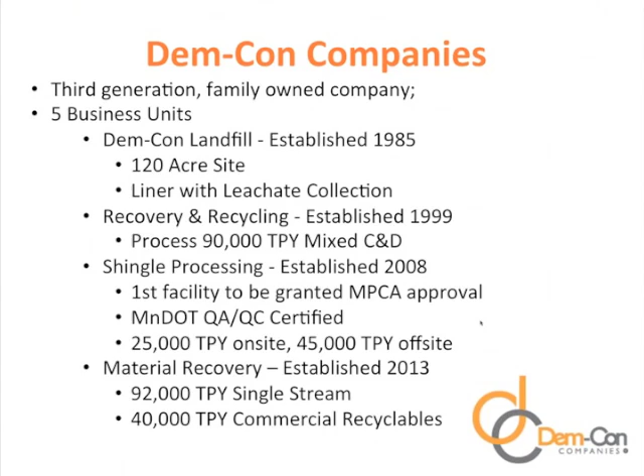And then most recently, we opened a material recovery facility that is a single stream plant. We do about 92,000 tons per year of residential and commercial single stream. In addition, that same facility processes about 40,000 tons per year of commercial recyclables, typically most source-separated OCC predominantly.

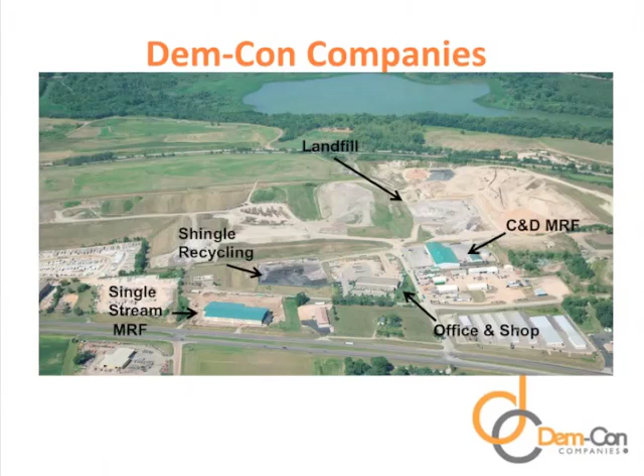We process those in 2 different areas. We have 2 different specs, and our hot mix asphalt producers like those materials separated, so we do not blend those together. And then in the bottom picture, the single stream MRF, that's about a 60,000 square foot facility that just opened up about a year ago. So a new operation for us, and that's been going pretty well.

So we like to do a bunch of different things.

This was a study done by Foth Infrastructure and Environment a few years back. Some of the data is a little dated, but it's one of the better pieces I've seen that talks about the different components of C&D. We see a lot of waste studies and waste sorts done on MSW, but we don't see near as many done on C&D, which is what we process on a daily basis. So when we have information like this at our fingertips, we tend to use it quite a bit.

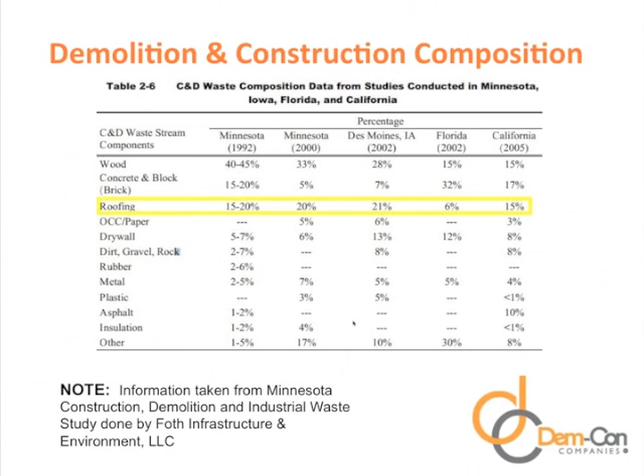But flat roofing is a pretty small percentage of those numbers. So it tells you there's a lot of asphalt roofing material out in the marketplace that is ready to be recycled. That was one of the things we looked at pretty heavily when we decided to get into the business. All right, next slide, Wayne.

As we mentioned before, there are 2 different types of asphalt roofing shingles we'll talk about today. One is manufactured scrap shingles. The latest studies show there's about 1 million tons of manufactured scrap shingles generated annually, and the majority comes from the 3 main producers: Owens Corning, CertainTeed, and GAF. We're lucky in Minnesota—we have all 3 of those plants operating in the Twin Cities.

At one point in time, we have taken material from all 3 of those. They've been great to work with, and they're very involved in the CDRA Shingle Recycling Committee. They have sponsored a lot of different shows, sessions, webinars, and our shinglerecycling.org website. Those manufacturers of shingles are very interested in seeing this material get recycled, and nationwide the majority of that tonnage is currently being recovered, which is a nice statistic.

The second type of asphalt shingle is the post-consumer tear-off. It's estimated that annually there's 11 million tons of this material generated nationwide. On an annual basis, that is a heck of a lot of shingle material. The percentage that's recycled is continuing to grow; however, we have a long row to hoe to keep all this material out of the landfill. So it gives you a little bit of scope of what we're dealing with as far as tonnages.

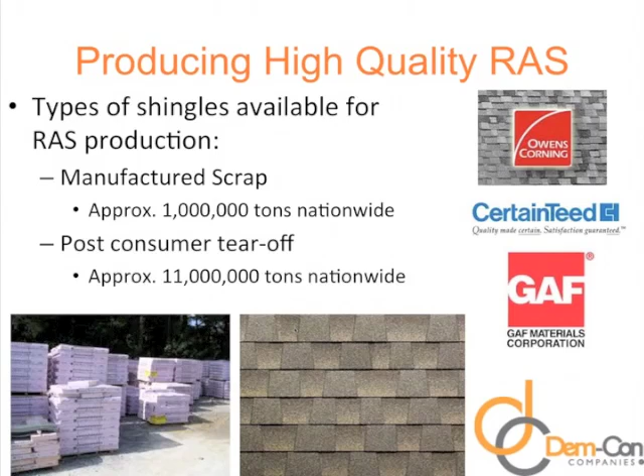Next slide. So we'll talk a little bit more in detail about manufactured scrap, and these percentages are estimates based on what we've found from working with hot mix asphalt plants, and depending on what part of the country the shingle's produced in, these numbers will vary a little bit. But the actual asphalt content within a fiberglass shingle ranges anywhere from 15 to 24%, and there's a pretty decent variation in range in there, but that's all based on the type of shingle that's produced. We've all seen shingles that are 20-year, 50-year shingles, and the majority of that is dictated by what ingredients go in there. So there's a decent range.

What we've typically found in our marketplace in Minnesota, the manufactured scrap shingles have around 22% asphalt within them. There are some manufacturing facilities that are making organic-based shingles. That has a much higher percentage of asphalt within them. We're seeing that in the 30% plus range. So if you're in a marketplace where people are still manufacturing organic shingles, you'll see higher asphalt content, which is a little bit more valuable to a shingle processor as well as a hot mix asphalt plant. But a lot of manufacturing facilities have moved away from organic-based shingles, but there still are a few out there.

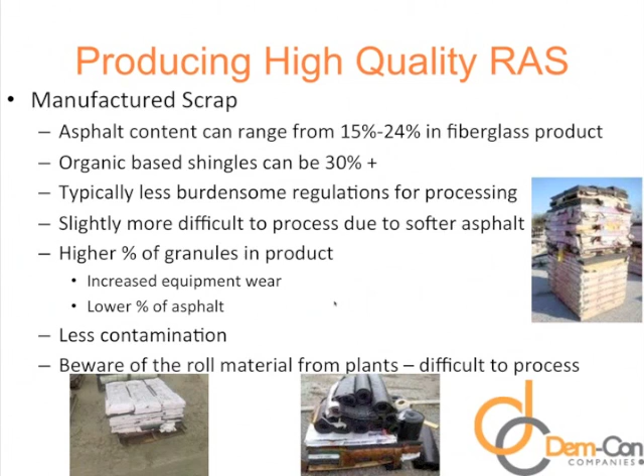The one cautionary tale or advice that I'll give is if there are manufacturing plants that include roll material in their product that they send to recycle yards, it's just very difficult to process. They tend to bog the piece of equipment down on the grinding side. Doesn't matter which grinder you have, they all are challenged with trying to process an entire roll of shingle or an entire roll of tar paper. So if you're looking into the marketplace and you're starting those discussions with manufacturing plants, just make sure that that's part of your discussion, knowing whether or not that material is included in there.

The second and the other type of shingle material is post-consumer tear-off, so it's just a fancy name for old shingles that were on somebody's house. This asphalt content is typically slightly higher than the post-manufacturing waste material. The asphalt content typically is seen anywhere between 20 to 25, sometimes a little bit higher than that. We push close to 25 in our marketplace on the post-consumer tear-off material.

There's less granule material due to the wear and handling, as I mentioned before. So as you lose granules at different spots along the process, your asphalt as a percentage of the shingle weight tends to go up a little bit. The asphalt's a little stiffer due to the oxidation process that happens when it sits on the roof.

One easy way to tell this is if you go and look at a brand new shingle, you can take it, you can bend it, and it'll bend real easy. You take a shingle that's been sitting on somebody's roof for a number of years, you try to bend it in the same way, and it'll crack in half. So the asphalt is a little bit more stiff.

One of the nice things about that is it doesn't re-agglomerate nearly as fast as the manufacturing material does. We can have this material sit in its final state for multiple weeks, even a month, and it doesn't really re-agglomerate back together, where the manufactured scrap in the warm summer months, within 4 days or so, you have to rescreen that material because it just clumps back up into bigger balls.

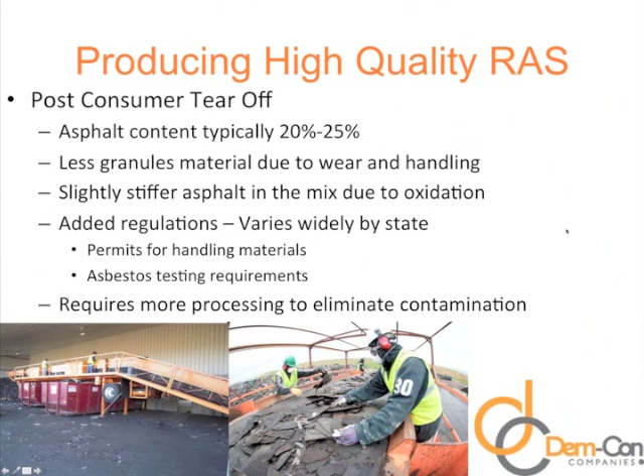And it does require more processing to eliminate the contamination. Like I had said, the manufactured scrap material comes in pretty clean. The post-consumer tear-off is quite a bit more dirty. So I just have a couple photos coming up here. I'll talk about them a little bit as we move through.

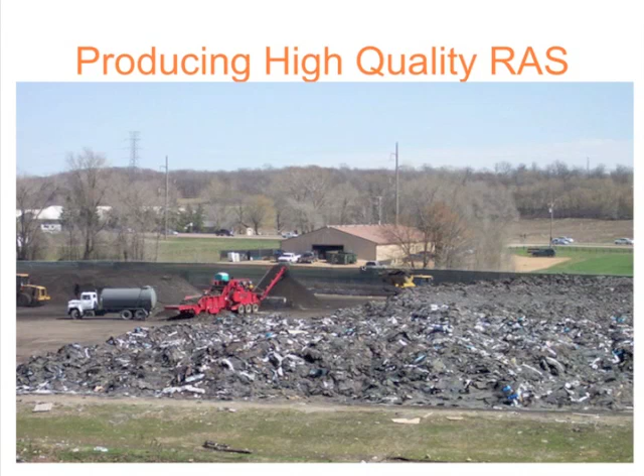But we'll usually grind first, screen later, and then the material on the upper left-hand corner, you can see just kind of a black pile over there. That's ground material that's currently stockpiled, being ready to be moved out to market.

The next photo is just a picture of us grinding our manufactured scrap material. So obviously the picture just prior to this was post-consumer tear-off. This is a photo of our manufactured scrap, much cleaner. We really didn't do anything to this pile. That's kind of what it looks like as it comes in. We feed this piece of equipment with a backhoe. It tends to feed pretty well, pretty smoothly, and then you can see the material coming off the belt.

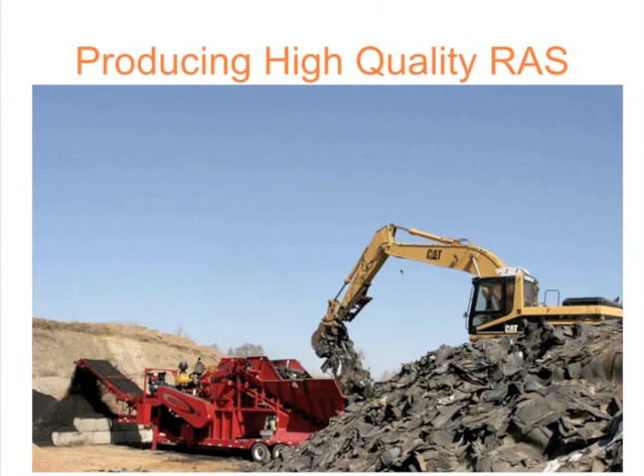Depending on what size we're grinding to, anywhere between 80 to 90 ton per hour coming off of those pieces of equipment is about what we see on a continuous basis, whether it's cold weather or warm weather. That's kind of the average that we see. So pretty good, steady eddy type of equipment that just processes on a daily basis. But this is our manufactured scrap pile.

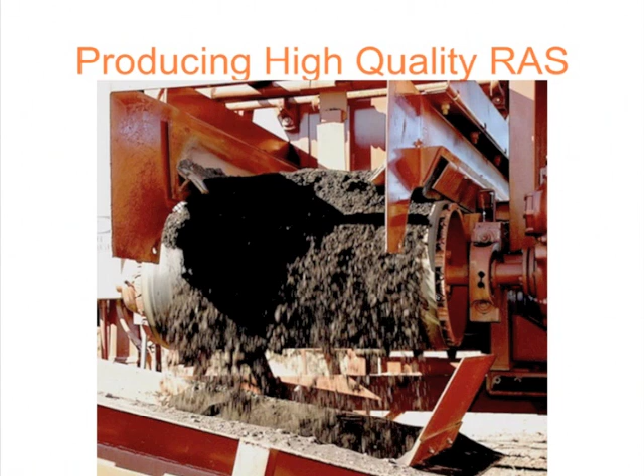So we delivered a good clean product to the plant, and that really helped move us along quickly, because they were expecting to see quite a bit of contamination coming off this, because they just couldn't believe that the equipment on the front end in our yard was able to take the nails out at the quantity that they were seeing them come out of there. So that was the good news. So next slide, Wayne.

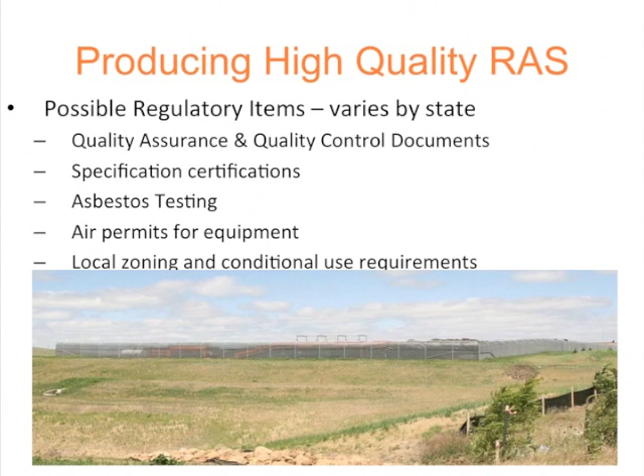So it's just one more thing to be aware of whether you permit locally or look at doing mobile grinding. Then there's local zoning and conditional use requirements. That's kind of a standard feature. If you're dealing with different materials, you just have to make sure you meet all your zoning and conditional use requirements if you want to start up a facility. All right, Wayne, next slide.

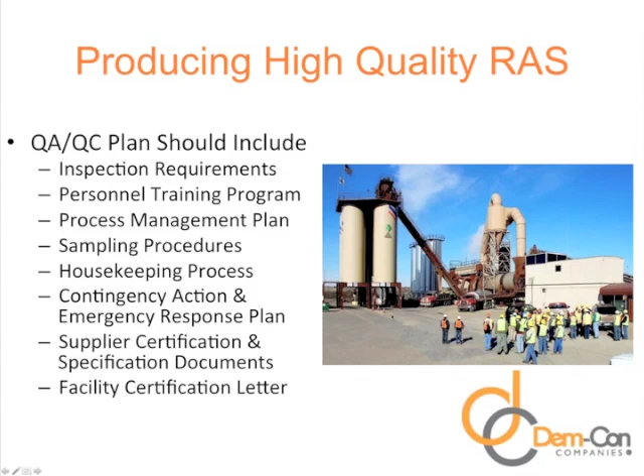Each hot mix producer will tell you what they want their specification to be, predominantly dictated by the Department of Transportation. But what we have to do is supply them a letter certifying that the material they're sending has gone through the quality assurance and quality control plan approved by the Pollution Control Agency as well as the Department of Transportation. So each load delivered is certified by us that it went through that appropriate process. That's the facility certification letter we have to provide to each hot mix asphalt producer we send material to.

So I'll talk a little about the Minnesota requirements. Each state is just a little different, but I'll go through Minnesota since that's what I know best. I think it has laid itself out to be a pretty good model for other states that haven't gone down this road before, and I think it can be used and replicated in other successful areas of the country.

So for acceptance of material on the manufactured scrap side, we have what we call beneficial reuse rules. There are certain materials that fall under this set of rules, and you have to apply for it. As long as you show the beneficial use of this and your process doesn't pose a threat to the environment or human health, you can operate under a different set of rules than a solid waste facility.

You have storage restrictions, you have handling restrictions. For example, we can only store a certain number of tons of this material on site. If we have more than that, we fall outside the rules and could be issued a violation. So there are still rules you have to follow, just a little less restrictive than if you're dealing with a different type of material, like mixed post-consumer tear-off material, which is next. In the state of Minnesota, which is different than a lot of other states, you need to have a solid waste permit to be able to handle post-consumer tear-off shingles.

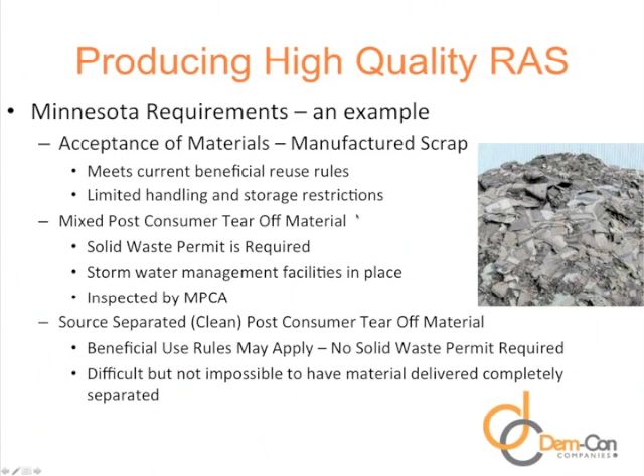So right now, we move all of our material across the sorting line just to ensure that it's free and clear of all contamination. All right, next slide.

Some of the different specifications -- when we first started out in the shingle recycling business, the only specification we had to deal with was 100% of our material passing the half-inch screen. As the markets moved, we started to get different specifications: 95% passing 3/8, then it moved to 100% passing the 3/8. What Minnesota currently has in place now is we need 100% passing the half and 90% passing the number 4 sieve. Usually if you're getting 90% on the number 4, the half-inch part of that specification is a no-brainer -- you're automatically going to meet that. But we've continually made the material smaller.

I think 90% on the number 4 is a very good size. It works well.

There are some specifications I've seen that require slightly smaller than that, and the only thing that does is add to the cost a little bit, because you have to screen it to a smaller size and then regrind the overs.

It's challenging to do it on a one-pass system without having a lot of wear on your equipment. So what we found works best for us is to grind it, screen it, and run the overs back through instead of trying to get everything through in one pass. It doesn't mean it can't be done, we've just found that to be less cost effective than being able to run the overs back over and regrind those. But the size specifications are continually getting smaller.

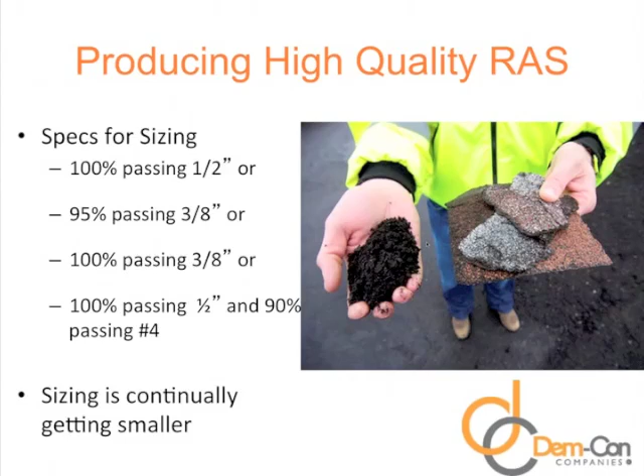So in this case, smaller is better. Some of the other pieces that we have to work toward while producing the high quality material is the deleterious. I didn't really know what deleterious meant until I started working with hot mix asphalt producers. That's the terminology they use for any contamination within their ingredient profile for their hot mix asphalt. So what we've seen across the country is deleterious specifications by weight can be anywhere from 3% down to half of 1% contamination.

Our Minnesota spec is actually half of 1%. So as we look at our material, we run it through a lab or a screen test, and basically what they'll do is look at that material, and anything that's not a shingle, they pick it out, they weigh it, and if it's more than half of 1%, we didn't meet that specification. So it's a pretty tight spec as far as keeping that material clean, but we found a way to sort it and keep it clean.

I asked what the reason for the small deleterious by weight was when we started our process, and the Minnesota Department of Transportation came back to me and said all the samples we took at your facility were under half of 1%, so we thought that was a good starting point, and they worked from there, even though other states typically at that point were about 1 to 1.5%.

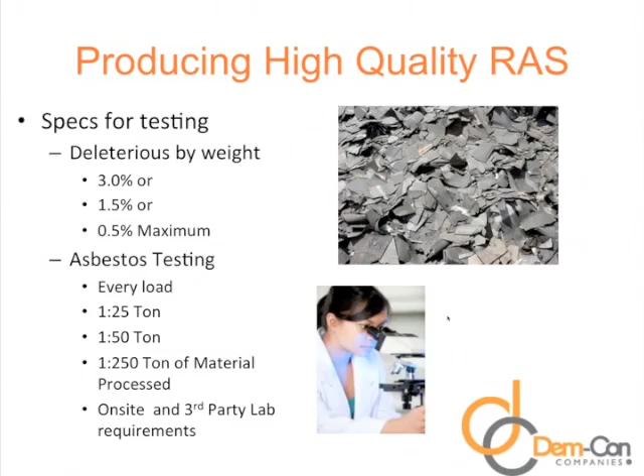As we started to develop a process for us for asbestos, this is kind of how we did it. So what we did is we tried to implement some procedures to minimize asbestos acceptance.

What we needed to do is have all of our haulers that we accepted post-consumer shingles from within our recycling process certified. That certification basically indicated that this home only had a single layer of shingles on it, and it was a single-family home, re-roofed, so it couldn't be a multi-unit dwelling.

Our current tests are 1 per 250 tons of pre-ground material. We have 2,000 data points from our site alone. We have one occurrence of asbestos that we found, and it was in the mastic, not in the shingle.

As I mentioned, MnDOT requires a certified inspector and a third-party lab. It's one of those pieces we worked really hard to get there. I think the data points proved themselves out, and what was one of our hardest hurdles to get over is now not even really a discussion point anymore. We've really been able to prove through data that the asbestos risk that was thought to be there really isn't there. That was a nice piece.

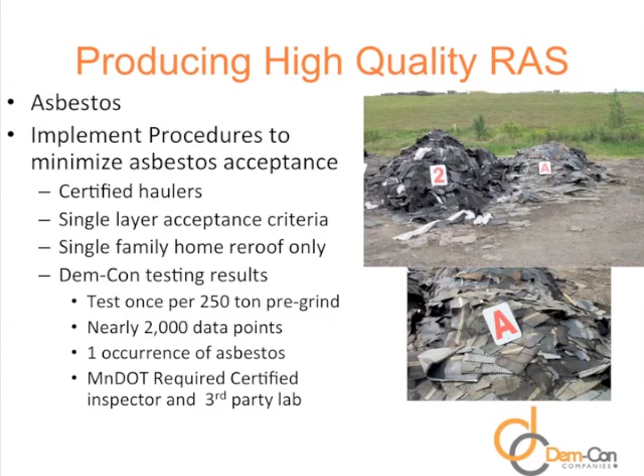There hasn't been asbestos used in shingles since the late 60s. So one of the things that was easy for us to get by on was, if we have a single-family home and it's a single layer, the likelihood that single layer has been around since the late 60s or early 70s is pretty minimal. Having a single layer of material torn off to be re-roofed and recycled really mitigates the potential for asbestos to be in that shingle. That really helped us out quite a bit.

Some other pieces that would be good to have in your mental file cabinet: if you're currently in the market, you probably already know these things. If you're looking to get into the market, just be prepared for change. Make sure you know there might be a size change requirement coming.

As I mentioned, we started out just with a half-inch specification, and it's continually gotten smaller. So make sure any equipment you select, and your processes, allow you to adapt and continually change to smaller sizing.

Asbestos testing changes, so make sure you're aware of how you're doing your tests and what intervals you may be required to do. And if you have enough data points, go back to that governing body and see if you can make adjustments to it like we did. That really helped out quite a bit.

Acceptance criteria may change depending on who you're selling your material to and what your state regulatory body is. The current rules may not be the rules of tomorrow. I think we deal in an environment where solid waste and recycling rules are continually changing, so we just need to be aware and able to adapt to those.

To be successful in shingle recycling, you need to find quality industry partners. One critical piece for us was having great relationships with the hot mix asphalt producers. Within the Twin Cities, we sell to a lot of the major hot mix folks, and they were a great partner in making this work. I have to admit, early on they were very skeptical of the material, but as we proved we could make the material clean enough, their comfort level grew enormously, which allowed us to continually move down the road with them. For manufacturing suppliers, whether it's the loaders, grinding equipment, or screeners you purchase, just make sure they are quality manufacturers of that equipment.

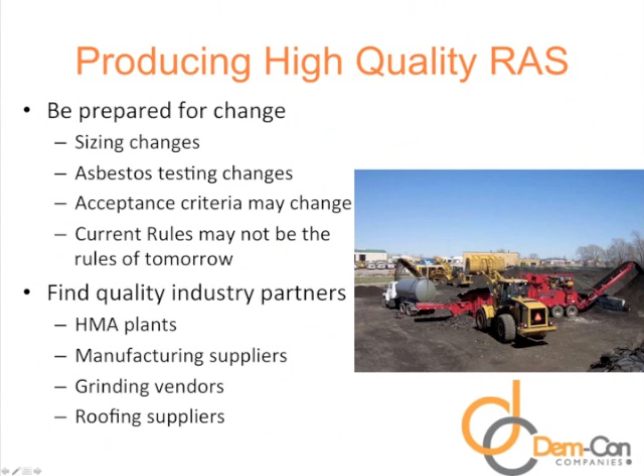And then roofing suppliers, make sure that the people delivering you material have an interest in seeing this succeed as well. Depending on your marketplace and the fluctuations in supply and demand, you want to make sure that all that's communicated with all the folks that are bringing you material as well. All right, next slide, Wayne.

So, challenges in the market. One of the things we're faced with is fluctuating market conditions. One of the things we've been able to do early on was to sell quite a bit of ground shingle material for hot mix asphalt. But as the economy started to go in a different direction back in 2009, 2010, we saw a lot of construction start to stall out. There was less new home building, less new commercial building being done, and less new road making.

And what we started to see were roads just being milled and overlaid versus new roads being built. So we started to see a lot of hot mix plants take back millings and RAP material, and Minnesota has a requirement in their hot mix design that they can only use 30% recycled asphalt binder within their mixes. They have to use 70% virgin. So our shingle material fits in that 30% asphalt window within their mix design, and now we're competing with the millings that they're bringing back on their site.

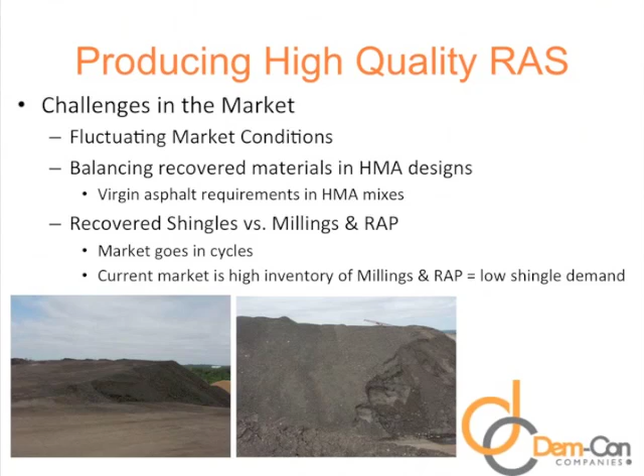And one of the things that's challenging for them is they really like the shingle material and it works well for them, but they have this material back on site. It's an inventoried item. They've paid for some of this material to come back to their site. So for them to use an alternative material like shingles and pay a third party like us to provide that to them, that doesn't work quite as well in their economic scenario as it does for them to use the material they have on their site. So it's just one thing to keep in mind. And in different places across the country that don't have a lot of RAP and millings in their inventory, shingles tend to move quite a bit quicker and better than they do in our marketplace currently.

All right, next slide. So I'm going to blow through this next set of slides relatively quickly, but this is just a little bit of a process flow. So as shingles come into our yard, they're scaled first, and then they're tipped on our floor, and then we segregate them for asbestos testing.

So as we hit that threshold, say 250 ton is where we're at right now, we'll label those either A, B, C, or D, 1, 2, 3, Roman numeral 1, 2, 3, and we'll take a sample off of those, and those are segregated away from everything else, until we get the all clear result back. Once we get the all clear from the third-party asbestos lab, we'll move that material into our normal processing.

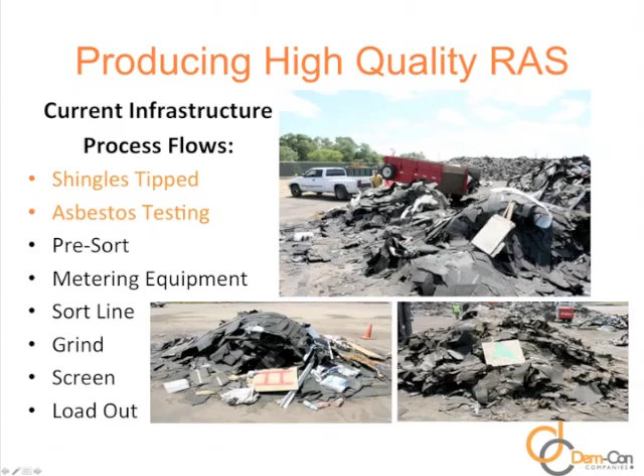All right, next slide, Wayne. So once it's cleared from the asbestos testing, I'll call it quarantine, we do a really quick pre-sort. So what we like to do on the pre-sort is pick out any large material that's not going to flow very well on a conveyor belt. So we'll pick out pallets, we'll pick out the roof sheathing like you see in that lower left-hand picture, valley tin, different things like that in the upper picture, and on the right, just anything that's large and clumpy that is kind of more trash related, we'll pick that out on the pre-sort.

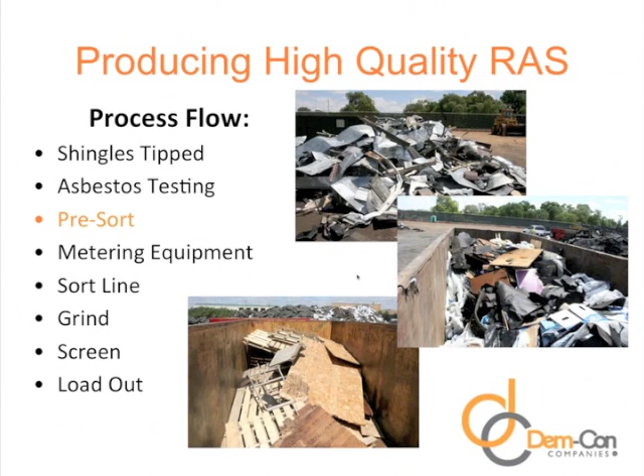And then next, it comes to our metering equipment. We have a trommel screen with a solid drum in it so we don't lose the granules, and we only use that machine as a metering device. It's kind of an expensive metering device, but it's one of the best that we found because it lays the material nice and evenly across the belt, allowing us to see everything on the belt and to be able to pick it.

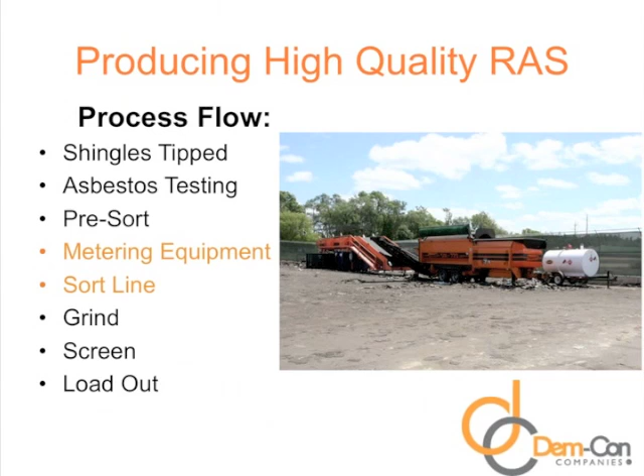So from the metering device, it goes onto the sort line, and then we place pickers on the sort line to pick basically everything out of the shingle that's not shingle and tar paper. The next step is to grind the material, and then we screen the material. So any of the overs go back out, and we regrind those, but the screen material for us is that 90% pass of the number 4.

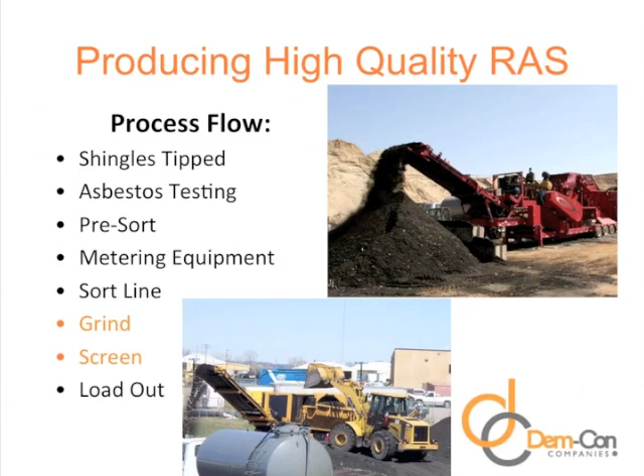Then the last piece, it's kind of common sense, but I included it on here for one reason. When we first started manufacturing some of this product, we weren't meeting the deleterious specification, and we were looking at the lab results, and the majority of deleterious content was rock. It's not a shingle, so it's still a deleterious material, and we found that it was from

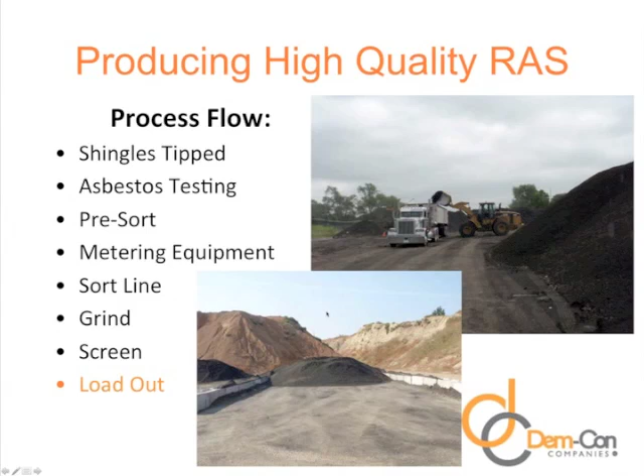our load-out procedure. So what we needed to do is to blacktop the area that our final product rests on, so when we're scooping this material up, we're not scooping up some of the base material underneath it and having rock material contaminate our product. So I included that on there; it is kind of a no-brainer, but it is one thing that caught us off guard a little bit by having a little bit of cross-contamination on the loadout.

So my last couple slides here, I just wanted to talk about the Construction and Demolition Recycling Association. As Wayne had mentioned, I'm currently the vice president of this association. Valerie Montecalvo is the current president. She operates in New Jersey. I'm also the Shingle Recycling Committee chair, and it's a very active committee. We have about 40 different people that sit on the committee. We hold bi-monthly conference calls, with maybe 15 to 20 folks participating on average.

Some of the things that this committee works on is trying to get a full and complete list of state specifications and contacts within each state. GAF has sponsored a Find a Recycler piece of the website where you can click on a state and it'll show different folks who are shingle recyclers, which has been pretty helpful. We have best management practices, technical work papers. We're continually trying to update the website with new information as it comes out.

We are working on asbestos and air quality data collection. It's challenging to get that information, but we've been working really hard to try to come up with a clearinghouse for that. And then we also host the Shingle Recycling Forum. There is a website that you guys can go and check out, www.shinglerecycling.org. It's run by the CDRA, but it's purely dedicated to shingle recycling. So you can go out there and take a peek at that.

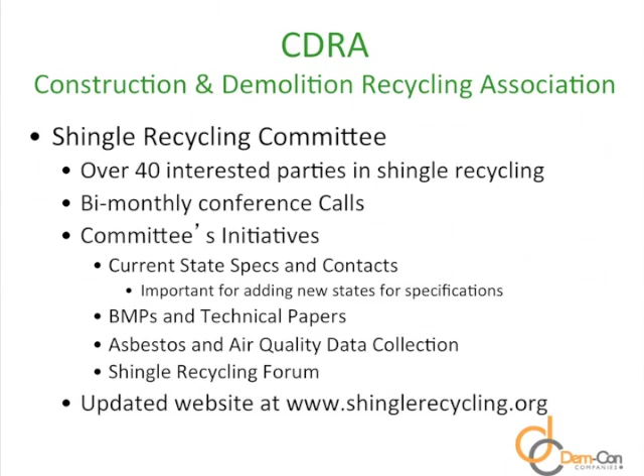Next slide, Wayne. For those of you on the call that are interested in more in-depth information related to shingle recycling, the CDRA hosts a biannual shingle recycling forum, as I mentioned on the previous slide. I feel it's the best industry meeting place for shingle recyclers. Anybody that is looking to enter the market, to refine what they're currently doing, or to find other alternative uses for the material, it's a great place for them to go.

We held the conference in 2013 in Denver. 2014 was our year that we don't host it, and we're back working on it for 2015. Typically, it's about this time of the year in the fall. We haven't picked the location yet. We are vacillating between three different options right now, be it Washington, California, or North Carolina. The committee's working on trying to find this location and get that out. And as soon as we do, maybe I can work with Wayne and the NRC to make sure that all you folks that have any interest get that information.

But there's 300 plus folks there, and it is purely shingle recycling for about a day and a half. We'll usually go and have a tour as well to a shingle recycling yard. So it's a great opportunity for people that are interested in this part of the business and marketplace to get together and share war stories, try to gather new information, and see what other opportunities are out there.

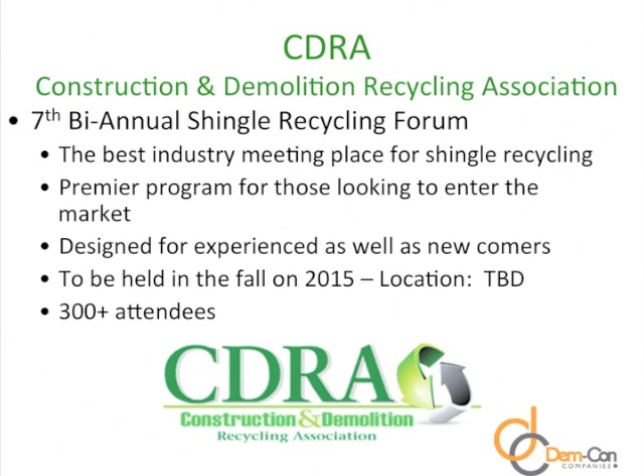And I think that is it.